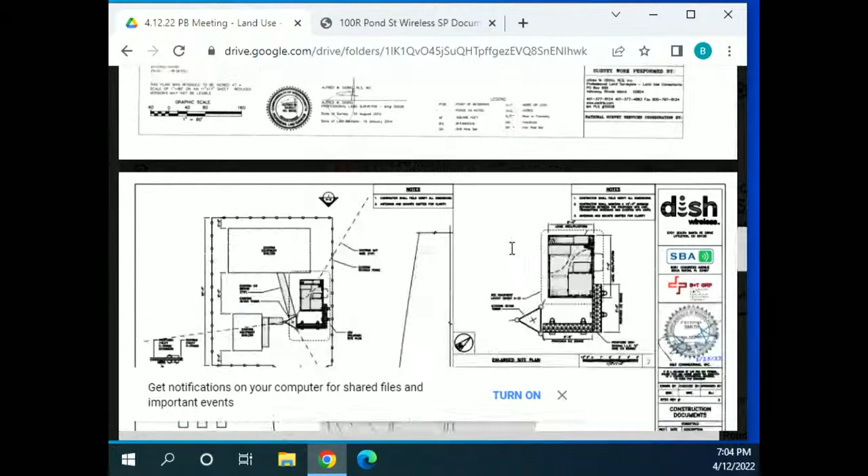Can that thing go away? Are these just traditional satellite receiver transmitters? Yep, exactly. Simple. I could get the measurements for you, but they're going to be like the radio heads, and the antennas are going to be up on the tower.

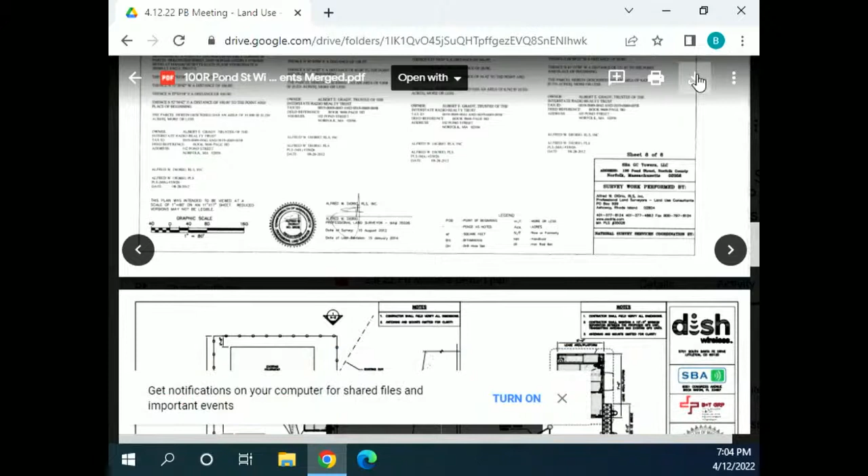But on the ground, I just want to show you that you currently have 3 - you currently have 2 other shelters on the ground. We're going to add a 3rd within that compound. The area shows what we're doing in terms of the actual size. The lease area that Dish will be leasing from SBA is only a 5 foot wide pad, and then they're going to have their ice bridge along the way that goes up to the tower. But it's going to be a 5 by 7 area in terms of leasing on the ground, if that makes sense.

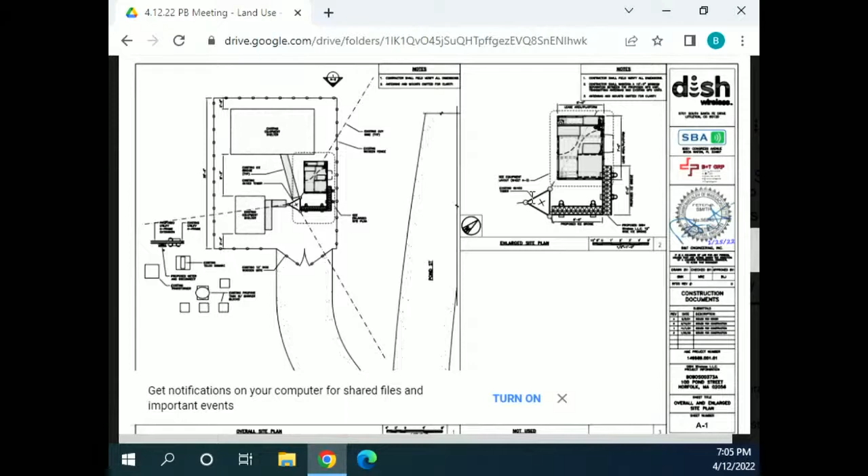Yeah, they're going to be leasing a few different antennas at different azimuths: 0, 120, and 240. They're 72 inches long and 19 inches wide. And the dish, they're going to be at the center line of 105 feet. That is page 11, Betsy. They'll show you how the antennas will be set up, transmitting radio signals.

Now, there are existing antennas on that large one, right? Yes, that is correct. There are antennas already at 130 feet up off the ground, and this is a guyed wire tower that stands 210 feet. Okay, so these are just fitting in below the existing ones, all right. Yes, that is correct. And slide 11 shows you where they would be in relationship to the other companies.

Is that a demonstration of just the new ones you're adding, or all the ones that are there? The current information shows all the current equipment on that tower, sir.

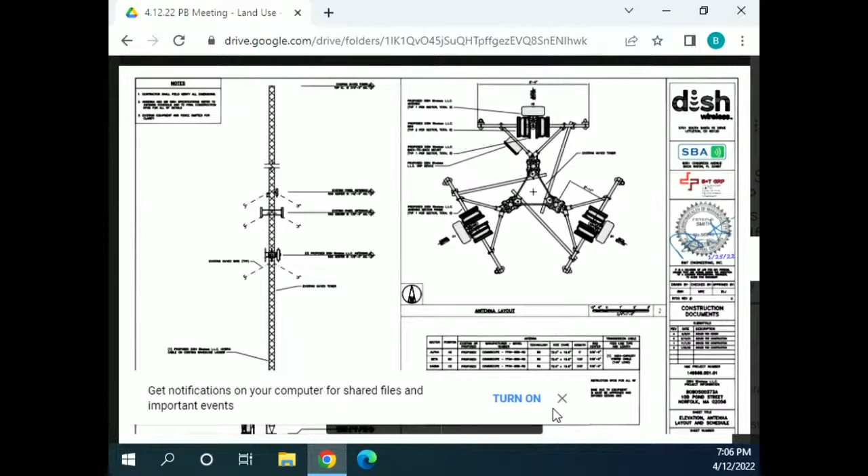Okay, so which one's the proposed? The proposed one on slide 11 shows it at 105 feet, 3 proposed dish wireless antennas, each showing different angles. So there'll be 3 antennas, and radio heads behind the antennas. That previous page, page 11. There it is, yes, that's it.

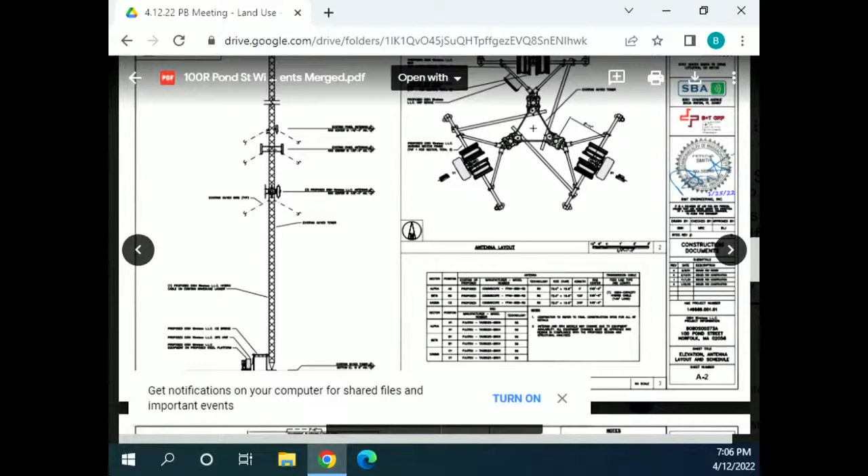So 105 would be the second one? Well, actually if you go from the bottom up, it'd be the very first one. It's kind of hard to read. Exactly, it's a little blurry on our screen. Yeah, I'm sorry about that.

And that 5x7 pad, is that just your MPO, where you're getting the signal from? That's it, all the utilities get in there. That's where the computer information translates the information for the radio signal, and then all the cables go underneath the ice bridge, up along that guyed wire tower to those antennas and to the radio heads, which transmit the information into the antennas.

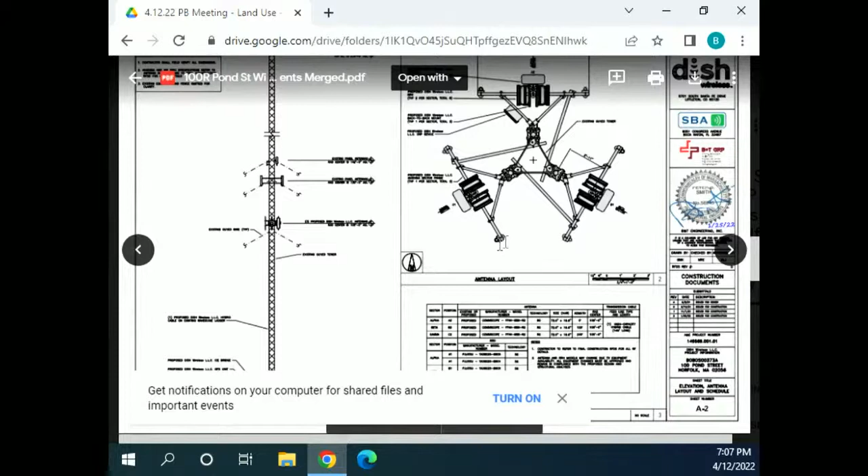Okay, so how big again, sir, is the unit you're putting on the pole? There'll be 3 antennas that are 72 inches height-wise by 19.6 inches width.

I always try to explain to people, these antennas are pretty big things, but you look at a traffic light and don't realize how big those are until they come down on the ground. Those are 3.5 to 4 feet tall.

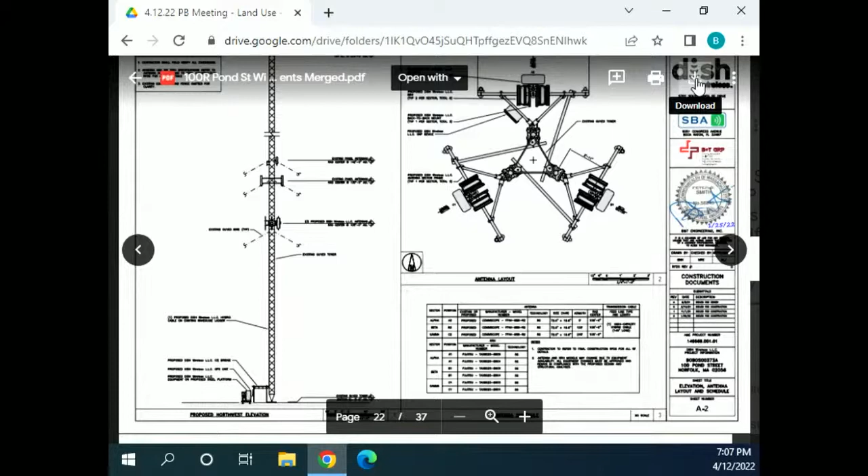How big are the ones currently on there? Probably the same height at this time. I don't have those exact dimensions since that's not my client, but I could look through the structural analysis report and tell you what they are. Give me 2 seconds... no, they're just more antennas of the same type, pretty much.

Do they create any noise, this particular antenna? I'm sorry, what? Will it create any noise? No, the antennas will not create noise.

Any other questions from board members here? No, pretty straightforward. Any questions from anyone in the audience out there? All right, well, hearing none, then...

I propose we make a motion to close the hearing, and then we'll just draft the decision. All right, so the Chair will entertain a motion to close this public hearing and instruct our town planner to prepare a written decision which we can sign in the near future.

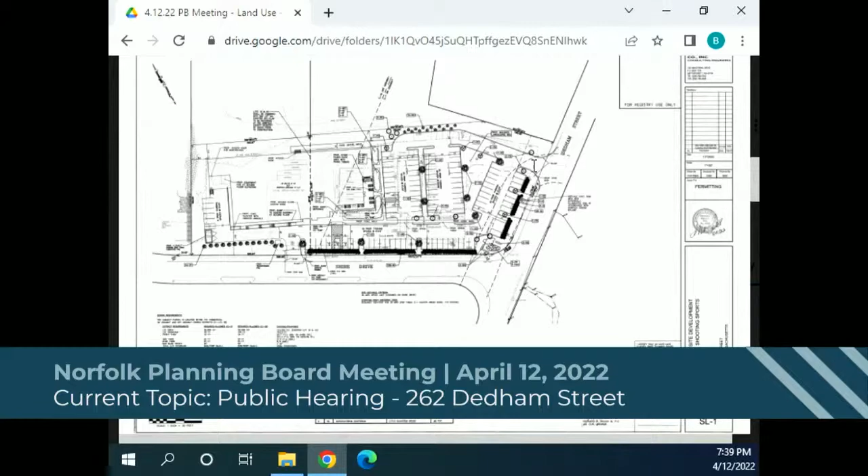That's the transformer pad along the entrance of Shire Drive, off of Shire Drive - that's the equipment storage we're talking about here. We had revised the site plan to include a row of screening evergreens along that side that would block the view of the transformer pad. Right there in the corner, right by the entrance. Gotcha, thank you.

I think that's all right - I wouldn't push for a fence around that at this point, given the industrial park setting. It's good they're screening it, but I'm not quite sure that section's really applicable to that use, the transformer pad - it's not outdoor storage, it's a utility. I appreciate the screening, but I'm not sure it's really necessary for that.

But nevertheless, they are doing it, which is a positive. That also addresses softening the view of the back half of the building from Shire. It does - we discussed that a bit with the design review board, that row of shrubbery there definitely does that. Just in terms of complying with the zoning bylaw, I don't think it's applicable for that piece. Correct.

We talked about the - how about this, page 8 here, T1? How does the board feel about the increase in traffic that's going to occur due to the business? What, as far as a traffic study? Yeah, I don't know if we've ever done a traffic study in any commercial area on Route 1A.

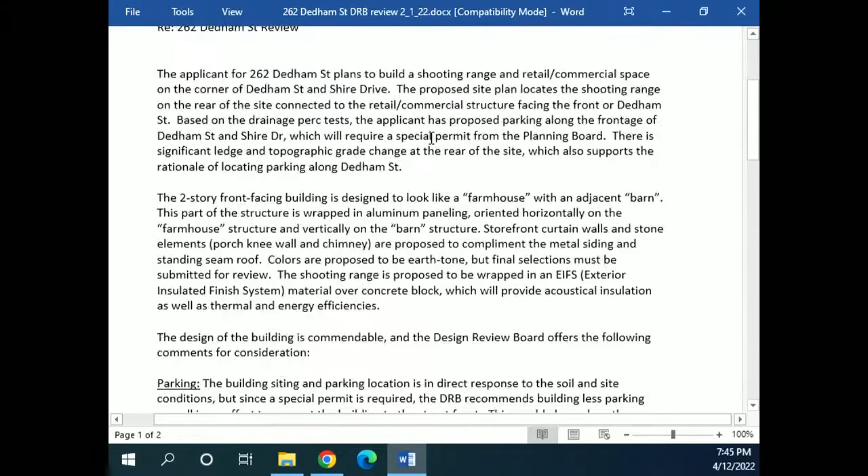So I believe we had the specific comments down below regarding the aesthetics and material choices. Scroll up a little, scroll down a bit, yeah. Okay, so here we go, parking, right? That's the first one.

I believe we've discussed parking already tonight regarding the front parking up front and the distance off of Shire. There was concern about pulling the building closer to Shire Dr. However, pulling the building closer to Shire Dr prevents a distance of sidewalk space between the building and the driveway, the required drive width, and then the required turning radius to actually exit out onto Shire. So pushing the building back any further, we are limited by the setback line on the adjacent lot.

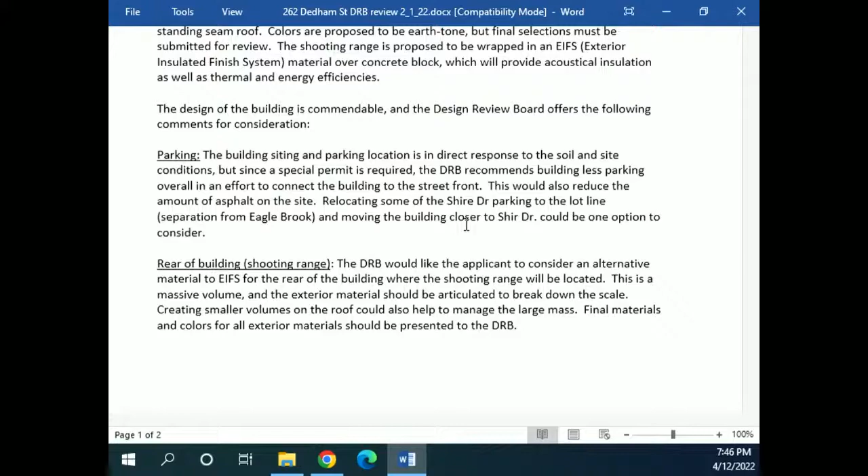That was a pretty easy one to resolve. Okay, now, was that information available to them when they made that comment? The dimensions weren't on the site plan to show those required distances, and to look at how the truck, because where we have the trash enclosure at the north corner, a truck has to make the turn and back up to the trash enclosure and out. So based on turning radiuses, the ingress egress point, and then the widths of the drives, that's what dictated our minimum setback. We could probably pull it a foot or two, but based on the positioning of the building, it seemed like value was not added.

Yeah, because for the record, these comments were generated February 1st, which was well before they had actually got to you, in terms of the public hearing. Because I think the siting was outstanding. Okay, let's see, next one, rear of building, applicant alternative.

This comment pertained to the material choice of an EIFS facade, which is an expanded polystyrene. I'm sure maybe you're familiar with the EIFS material. Is that the one they decided to use on the fire department? I am not familiar with the fire department. It's not a relatively new product, it has come a long way, but it is a very historic product.

A lot of changes have been made in the last few decades for the material used. It had been around since the 70s. I was going to say 80s, but then I'm born in the 80s, so it's been around since the 70s. But it has come a long way. The product now, we've chosen that material only because we have such a large expanse of facade, and we want to be able to articulate something with reveals and designs. The overall assembly for the shooting range themselves is really going to be driven by our acoustics.

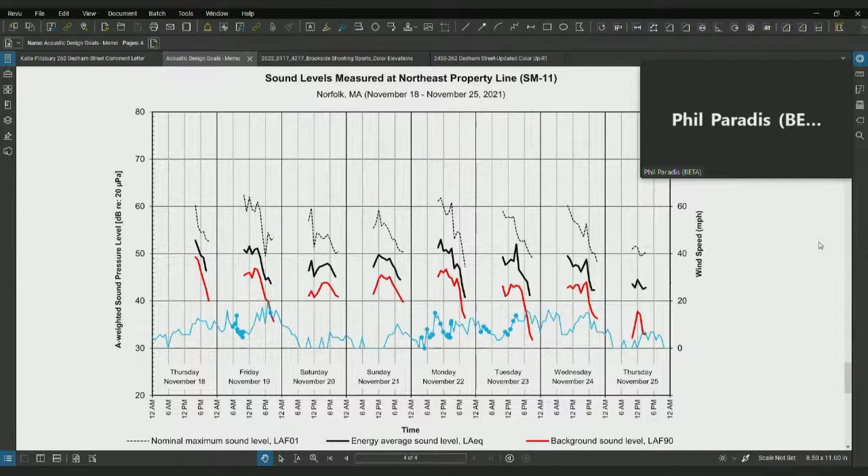So anyway, these generally are not applied at commercial property lines, but at what would be the first sensitive receptors, which in this case for this project would be the property lines at 5 Sharon Drive, which is about 300 feet distant from the site.

So the sound level limit associated with the state noise policy would be 45 decibels. You'll notice that for the most part, when the facility is operating, the background sound is already above 45 or very near it. As such, it's likely the gunshot noise would be either very lightly audible or not audible at all. During the quietest hour, around 9 o'clock at night, there might be an indication that the sound from the gunshot could be above the background, making it perceptible. Nobody wants to oversell the fact that this won't produce noise - it just will produce noise at a liminal level consistent with the existing environment.

Certainly it would be quieter than a loud car going by on the street, or a truck accelerating on Route 1A, which would produce louder and higher sound levels than the 45 dB we've defined as the limit for this project.

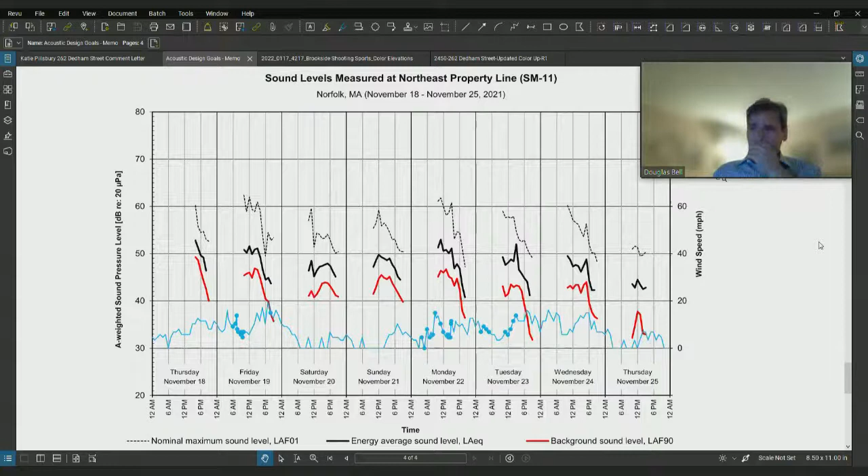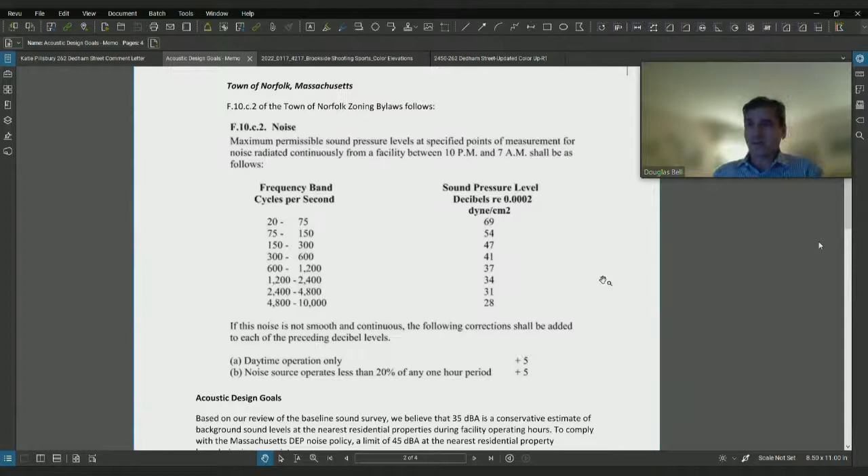Let's go back to the regulations section - I want to point out one other thing. We can stay right on page 2. The city or town of Norfolk does have a noise ordinance. We examined this very carefully, and what you'll see is that the noise ordinance has various sound level limits associated with various discrete frequency bands, so you can produce a certain sound level at very low frequencies, and these levels change with frequency. Unfortunately, the frequency bands established by this regulation became obsolete in the early to mid 60s, nearly 60 years ago. As such, there's no instrumentation available to measure to this standard, unless you'd go to a museum, I'd guess.

So you're saying we need to update our noise ordinance? You would need to update your ordinance for us to say we comply to the strictest level we can. However, I'd like to tell you a few things about this.

I can take the data within those numbers and extrapolate a sound level limit that appears to follow the intent of the ordinance. That suggests your noise ordinance, as written today, would require a sound level limit of 50 decibels during daytime hours, coincident with the operating hours of the shooting gallery. As I said, based on the state noise regulation, we've determined a limit of 45 would be applicable. So to some extent, your noise ordinance isn't as protective anyway as the state one.

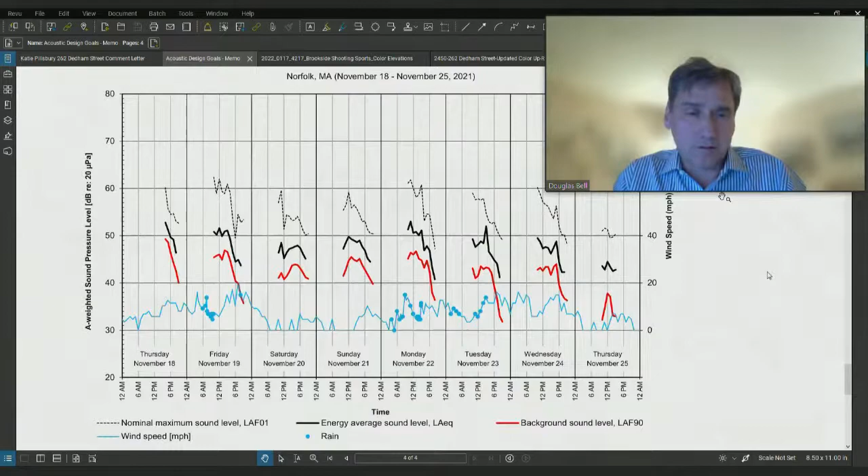What discrimination do animals have in that regard? I'm not an expert on animal hearing at all, I couldn't answer that question, I'm sorry.

We have someone in the audience who... Don't we finish first? Betsy, we also have people in the lobby who might be waiting. Somebody texted me. Oh, okay. We have people in the lobby? I'm not able to let them in. Yeah, everyone's been admitted. Thank you, okay.

Well, what's the consensus of the board? Should we let the lady speak now, or should we finish these gentlemen and then let her speak? If I can just finish one last statement, just so we can summarize some of the points that we've made. Finish it. We'll get to you, believe me. Yeah, I just want to summarize, and then I'll hand it off. I want to take a minute.

So we've defined the standards which we're applying, the analysis that's been conducted. We've discussed from a context point of view the operations, the building design, the business hours, and the limitations on ammunition type for acoustics. We've also wanted to talk about the existing noise creators, context, being State Highway 1A, only 350 feet away, with 24-hour use.

The bait shop, which has wood cutting, which is another business. Eagle Brook Saloon, which is open till 11 p.m., also a noise generator, direct abutter. The police station, which has a shared access road and, of course, has sirens going on Route 1A, as well as the gas station, which is also adjacent use, which is 200 feet away from the site in question. So there are quite a few other, just from a context point of view, other

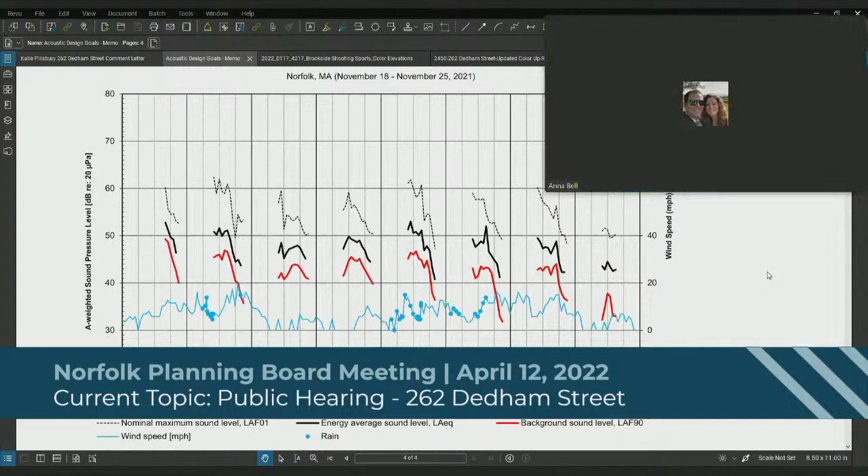So the inverse square law essentially says that as you get farther away from the source of sound, it gets quieter, and it does so with the square of the distance, meaning if you double the distance, the sound level, the sound pressure, reduces by a factor of 4, 2 squared. In a logarithmic sense it gets even more complicated, but there's a very simple rule of thumb that we use in acoustics, which is that if you double the distance from a source, then it would reduce by 6 decibels. So if we have a sound level of 50 decibels and we're 50 feet away from it, when we move back to 100 feet away, it would be 50 minus 6, or 44 decibels.

Thank you. And Doug, to add on to that, can you state the requirements of the decibel level that's not allowed to leave the limits of our site? The decibel level is going to be involved with the size and the design of the building as to what one might measure right at the face of the building. That hasn't yet been determined. What we will be designing to is reaching a maximum sound level at the property lines of these residential receptors of 45 decibels or lower.

So that, again, if you're... Thank you. One way of looking at it might be that if you're 300 feet from the building and you move to within 150 feet of the building, then the sound level would be potentially 50, 51 decibels. You get closer and closer. That requires that we're looking at sound level reductions on the order of 80 decibels between the interior of the building and the exterior. That's both achievable but requires significant acoustic design and acoustic details to make sure that can be achieved. Thank you. That's all I have.

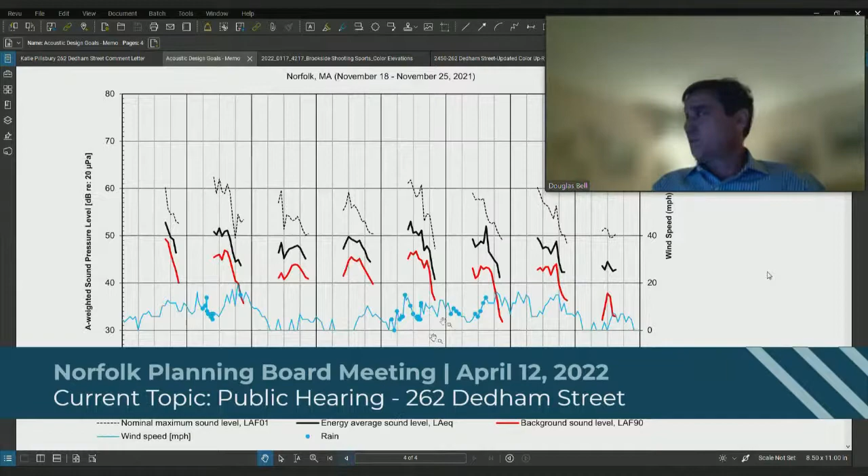But my interest here was — and can we go back to the figure that shows the site? — to find a location, that SM-11 location, that was most representative of those homes that are just to the north of that. Okay. And you'll see what you want to have is line of sight or no interference between the road, the main source of noise, as they do.

I mean, again, to simulate that. So I feel that the SM-11 point is, and again, it's somewhat irrelevant what happens after the building is put in place, because the property line behind it is a commercial building and would not likely be affected by sound from this facility. The spaces we're most interested in, the most sensitive, would be these residential properties where you can see the roofs of the buildings in this aerial photograph.

All right, you only lost me a little bit on that. Because I would have thought that once the building is there, you would be getting better data than you are getting now. You're saying that's incorrect?

That's incorrect, in that right now what I'm interested in is trying to represent what the background sound level is today at that home where the hand is on the cursor right now. If you want to just move that around a little, Dexter, that would be great. Right there, so understand, that's the baseline. And as you see, there's no large building between it and Route 1A either. So if I were to put my microphone behind a big tall building, I might find levels that are lower than are really representative of what that environment was.

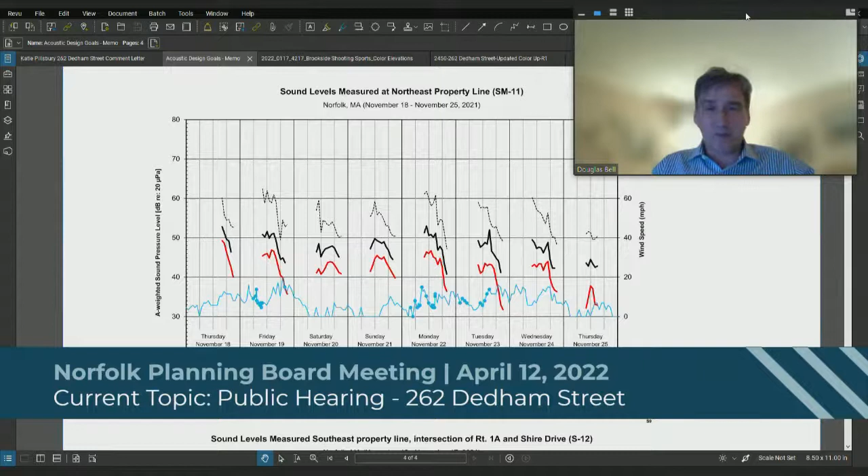But it is commonly done - there is post-construction testing done regularly. Mitigation options at this point would potentially include that if it was necessary, and I've not had to do this in my work, but there would be potentially two different options that might be available. One is, if you look at the design here, I should go back to the sound level data we examined on the site. There's a very, very significant drop off of background sound that occurs around 6 to 7 o'clock at night. So during the hours between 10 a.m. and 6 p.m. there's much greater masking sound available, and in that area you wouldn't need to meet 35, but you'd have to be under 45.

There could be restrictions on caliber and hours if necessary, though that's not something I foresee being needed. There could also be administrative controls and potentially supplementary acoustic elements, perhaps tall barrier walls or an additional wall along the side of the building. But we're not trying to solve a problem we don't have at this point.

The goal here is just to make sure our designs are conservative, and because of the stakes involved, we're going to be very conservative in the approach. I would think the board would include as one of its conditions a post-construction operational level sound survey to confirm the design is meeting the objectives.

Reasonable, thank you. I just wanted to know that if we didn't meet those objectives, there were other backup plans or mitigation we could proceed with. It's got to be, sure.

Normally there's a factor of safety if you're designing something, right? You're designing a bridge, you get an extra couple miles per hour of wind one day, you don't want it to fall. You didn't mention things like that, and I know how you got to the 35 and 45 decibels, and that's not to say that 45 decibels is by any means the limitation of all the acoustics and mitigation you could throw at this.

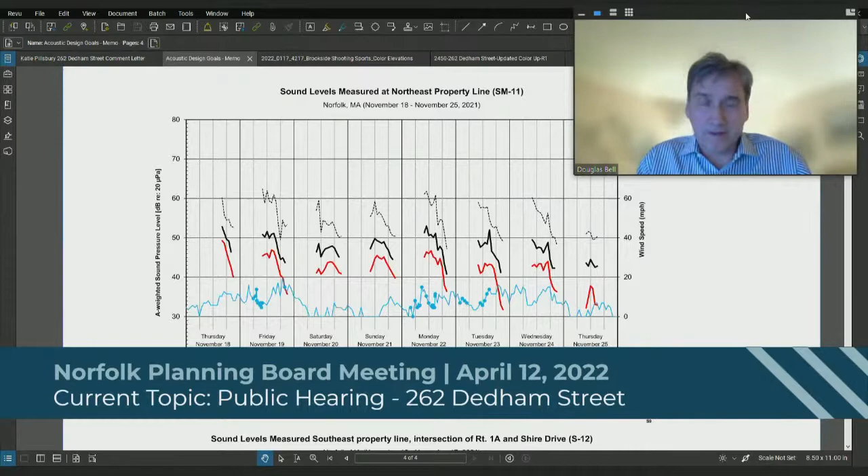The ultimate testing would be done perhaps by taking measurements with a handheld device, where you would set up and simulate activities in the gun range. You're looking for a yes or no? Let me go on, thank you. You're getting over my head again.

Do you have a record of any sound testing done at the Holliston facility? Because I actually was involved in that for a number of years. I'm not even familiar with the Holliston facility. You guys know? I know that it's an older facility. It's not that old, it's probably 20 years old, 15, 20.

All right, I understand. So basically, to me, you comply with all the state requirements. The testing is, you're sort of on your own to come up with the requirements. So as far as this board goes, I believe we have to comply with the law. So it seems like if you're saying you complied with all the state requirements and are within those levels, then I would say we have a hard time proving against that unless we decide to contest your testing, which I'm not in a position to do myself.

I think Walter's suggestion that we go back and retest down the road once it's up sort of covers everybody. You're not going to build this expensive facility and not have it complete and fail the testing. So I think the suggestion by our chairman really covers everything that's probably unknown at this time. I think it's a good suggestion, but I'm worried about what kind of mitigations we have at that point.

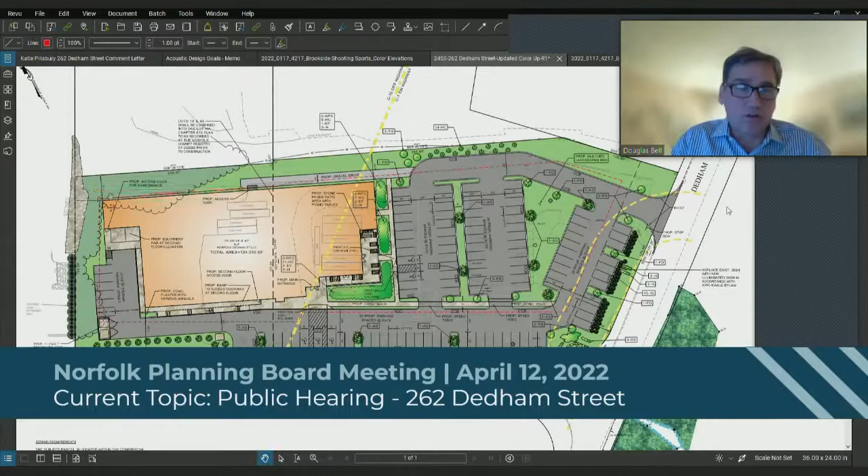Yeah, I was thinking as I was reading the question, I was thinking of the sound barrier walls you see alongside highways that have that mitigating property. Yeah, keep the noise level from the highway from getting into, or at least cutting it down, getting into the adjacent neighborhoods. I don't know whether the board would entertain that, but again, that's a what-if for down the road, after we do the post construction and get the operation up and running and measure the sound level again. Exactly, to find out what's going on. That would be possibly one of, who knows, a dozen different ways to mitigate a problem if it exists.

Okay, any other questions coming in from Zoom, by the way? Betsy, you see anything? Any hands up? I don't see any. No? I want to add.

Please take a microphone and identify yourself. My name's Mark Clarisi. I live at 22 Everett Street in Norfolk. And I've been shooting for probably 55 years.

And you can carry on a conversation inside the non-shooting range of an indoor range. You know, the range is behind you, the people are behind closed doors. So by the time it gets outside, think of it this way: the dogs are in their kennels, and it's raining out, and raindrops are hitting wood or metal. If they hear it, that's what they're going to hear. Just to give you an idea, with the way these guys are engineering this, and I've been in them, I belong to a club that has an indoor range.

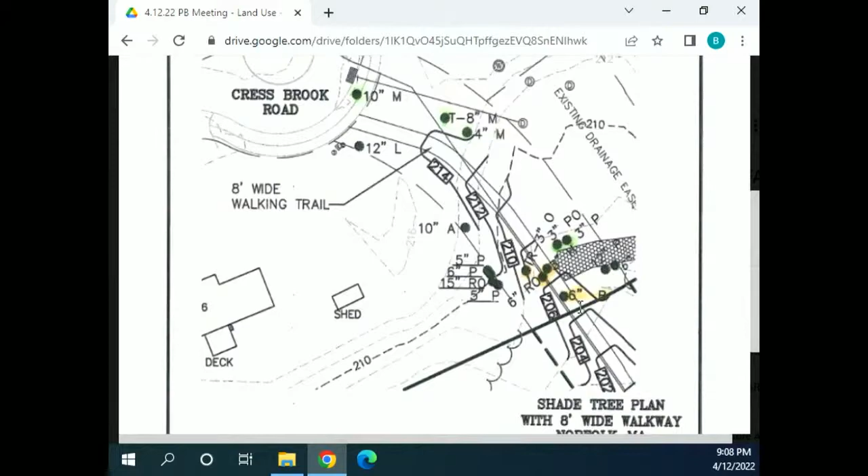So we will address that, but not tonight. We need Rob here to discuss it with us. But thank you for raising it, we will deal with it.

Thank you. Okay, anything else on Norway Farms, Rich, before we move on? No. Okay, next item is MacArthur Avenue definitive subdivision.

Review and approve the decision for a roadway improvement plan for one existing lot on MacArthur Avenue off the end of Hunter Avenue. I think we have the decision in our package. We've reviewed it, and we should be prepared this evening to sign it.

I think we've already taken the vote to approve this. Is that correct, last meeting? Yeah, voted to close the hearing. We closed the hearing, we didn't approve it. If you close the public hearing, this will be the vote to approve it.

So that, what's before you has been forwarded and submitted to the applicant and their attorney. I believe they didn't have any issues with what's been drafted.

All right, so how many pages is this thing? It looks like it's 7 pages, okay. Any need for further discussion on this before we take a motion and vote to approve it.

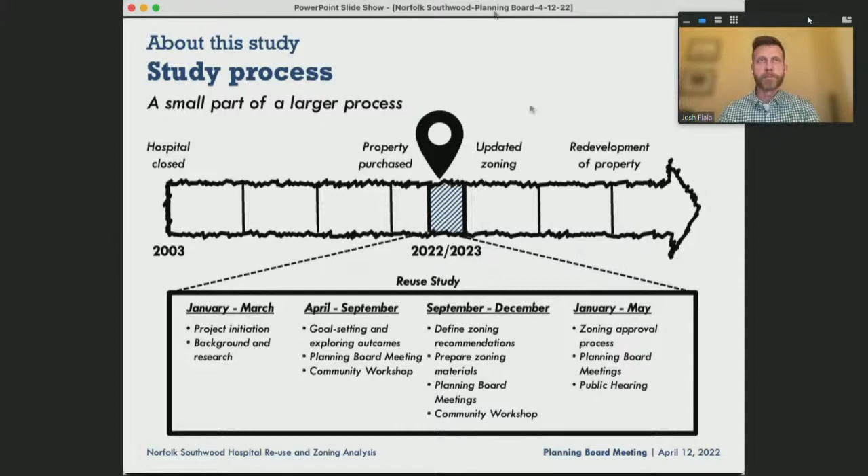So I'll pause there and just see if the board has any questions or comments about that first introductory section.

Continue. Keep going. All right, we'll keep going. Thank you, Chair.

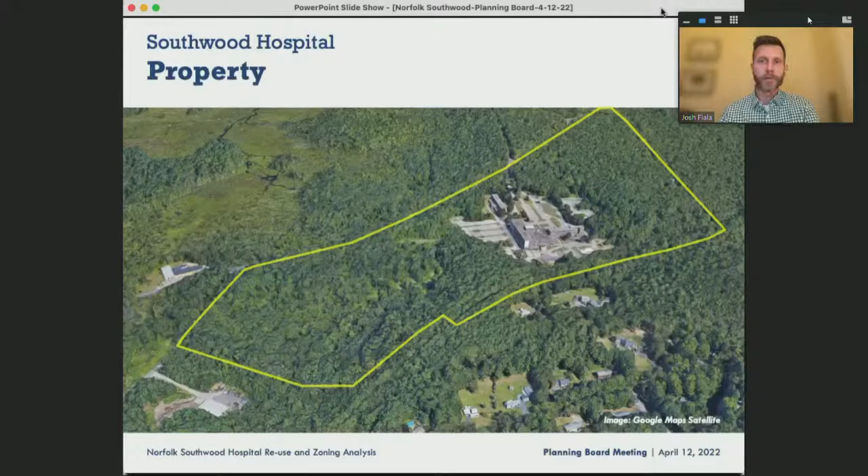I'll go a little quicker now. I threw in a few slides that are a snapshot of our initial research and investigation, but I wanted to show a few about the site itself. The overall property boundaries are shown roughly. We need to reconcile our property boundaries with those identified in the public involvement plan and make sure we've got exactly the same parcels. I've noticed our overall outline here is a little different from that previously presented by the property owner.

Overall, the property is highlighted here with some of its statistics, about 88 acres. Again, a long history on the property with the state hospital, lots of milestones, including it being associated with the first efforts around cancer research and some real significance around its property history.

In 2020, the investment group, the current property owner, presented a concept to the planning board, including a distribution warehouse potentially, and that I believe was a catalyst for this planning study to help look at potential reuse opportunities and options, which would hopefully be better aligned with what the community would like to see on the property.

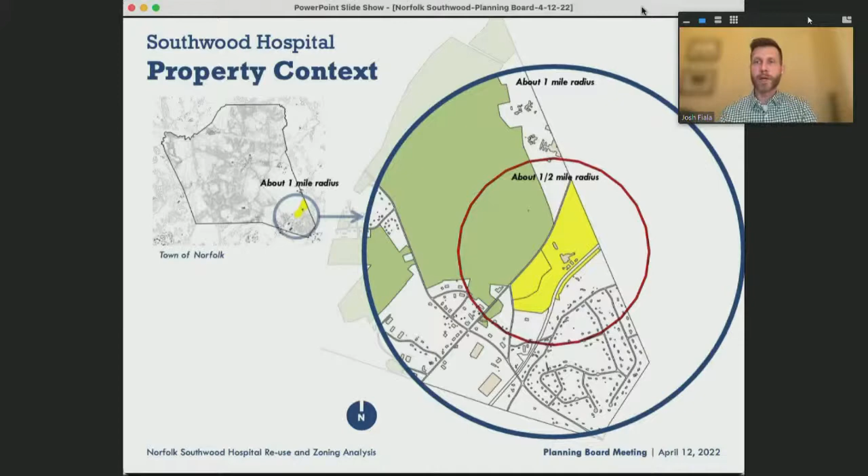Here's the property context in the southeast corner of the town, with neighboring context also in the town of Walpole, and a small portion of the property itself is in Walpole as well, one of the parcels.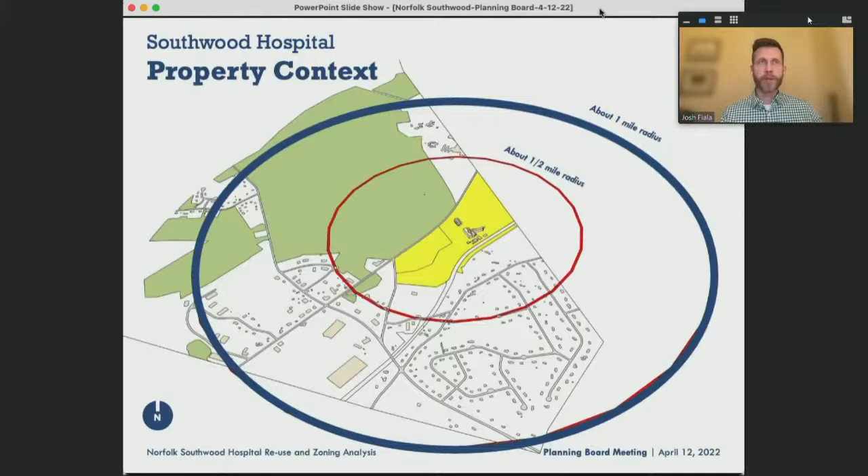Here's another view of the property context as well. The topography on the property is something to note, shown in the diagram now. The topography flows from a high point at the Walpole town line across the site. You can see some neighboring properties are also at a higher elevation relative to the property itself.

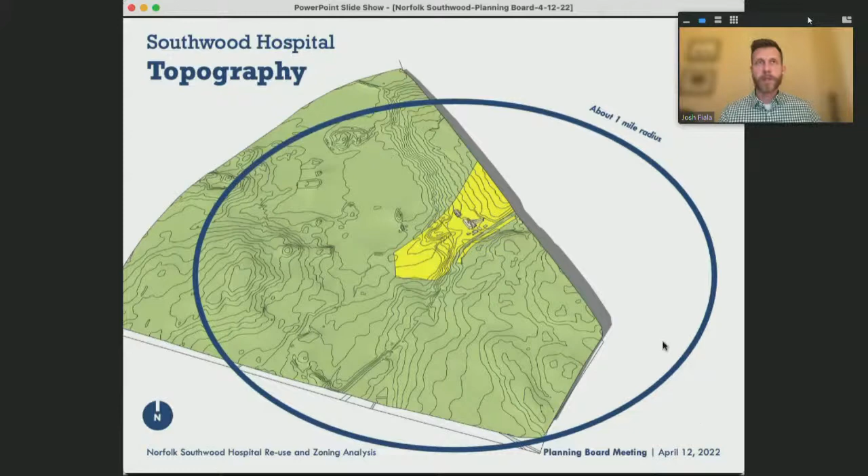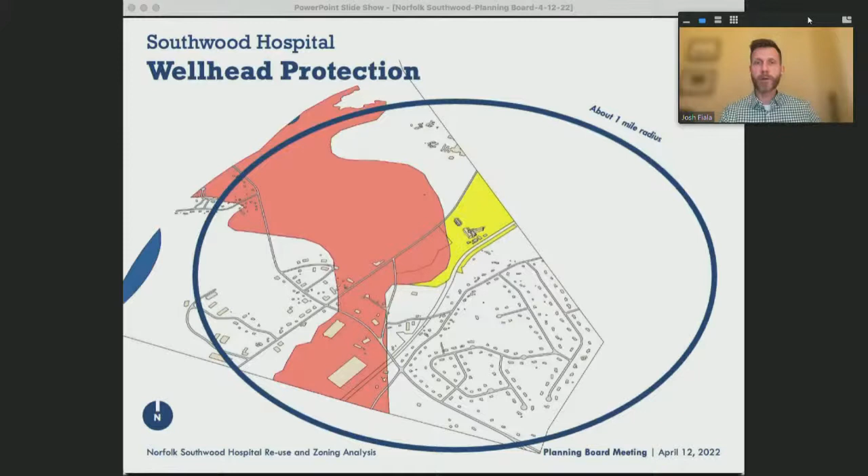After viewing the topography, the wetland locations make a little more sense, with water flowing down along the property to the area in green on this diagram. A wellhead protection area is also present in that portion of the property. And some flooding areas are highlighted and outlined along the Stop River, which is adjacent to the property itself.

In addition to these diagrams, which we've started as part of our initial investigation, we'll also be adding locations of contamination on the property, which is an important topic and consideration in terms of those locations and the potential reuse options we'll be exploring.

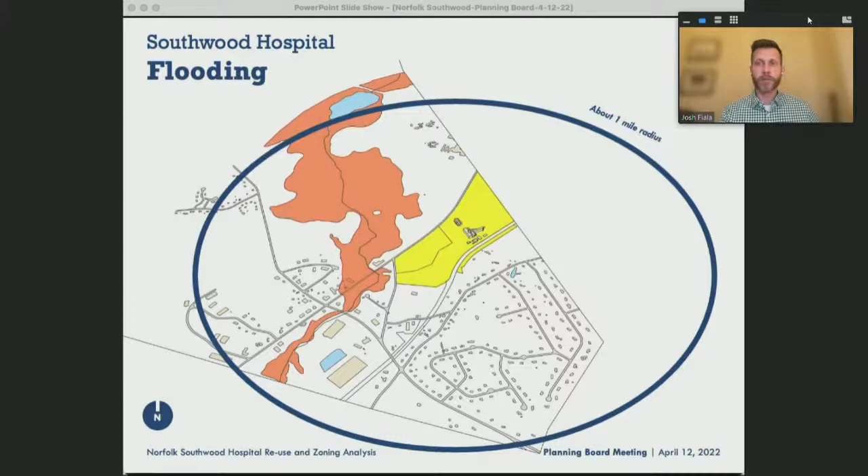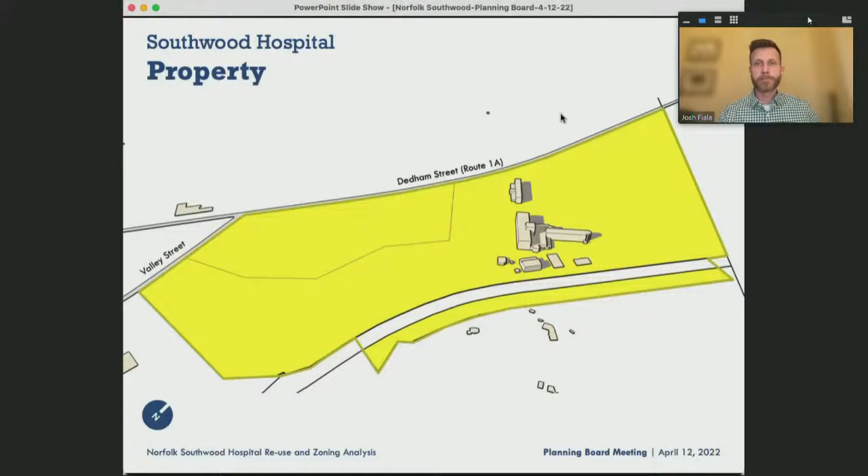Here's another view of the property with the existing structures which still remain. The property is about 88 acres in total, as I mentioned. If you remove the wetland and wellhead protection areas, that leaves about 75 acres remaining, shown in yellow on the diagram now.

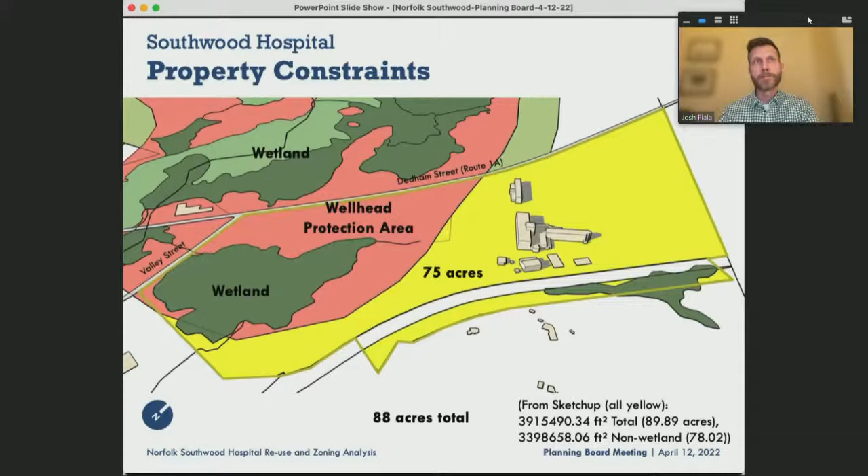This depicts the paved areas, shown concentrated in and around the existing buildings. Significantly, I'll mention that the proposed route of the Metacomet Greenway is directly abutting the property and will be a potentially great benefit to the property in connecting its future development through multimodal connections to the surrounding areas.

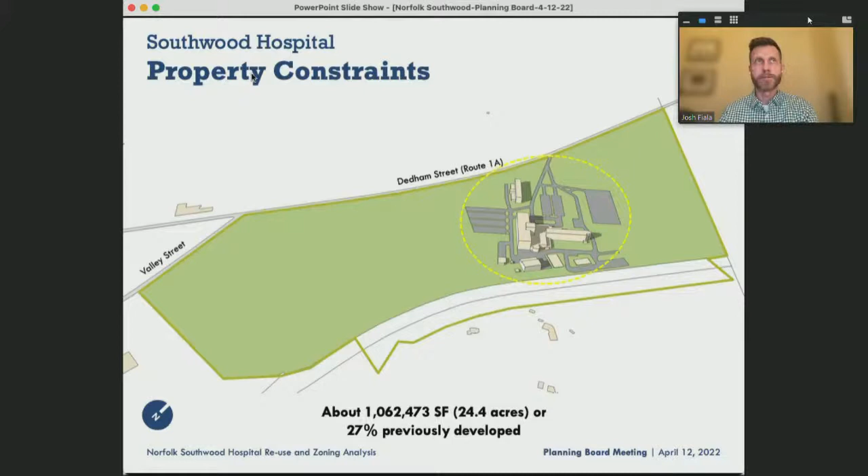In addition to looking at the physical attributes and constraints of the site, we've been reviewing past plans, and we invite the board or general public to refer us to other plans which might not yet be on this list, including from the property owner if there are more recent documents we may not have yet. We're looking through these to make sure we have a solid foundation and understanding of what's been previously explored, and also looking at the documents which form the foundation for the town's perspective on this property.

That includes the zoning bylaw, of which there is a zoning district today for the property, the housing production plan, which is currently being updated but the most recent version we have is from 2017, and the Norfolk master plan from 2007. Each of those documents do actually mention the property, and I'll touch on that now.

The housing production plan states to work with the owners to redevelop the property with a mixed-use housing development with a significant affordable housing component and expansion of the diversity of Norfolk's housing stock, which is primarily single-family today.

There's some additional language from the housing production plan. I won't dwell on that tonight, and some other items from the plan. The Norfolk master plan indicates that the property is within the open space goals to clean up contaminated sites near valuable open space, and it includes reference to the Southwood Hospital along Stop River Corridor.

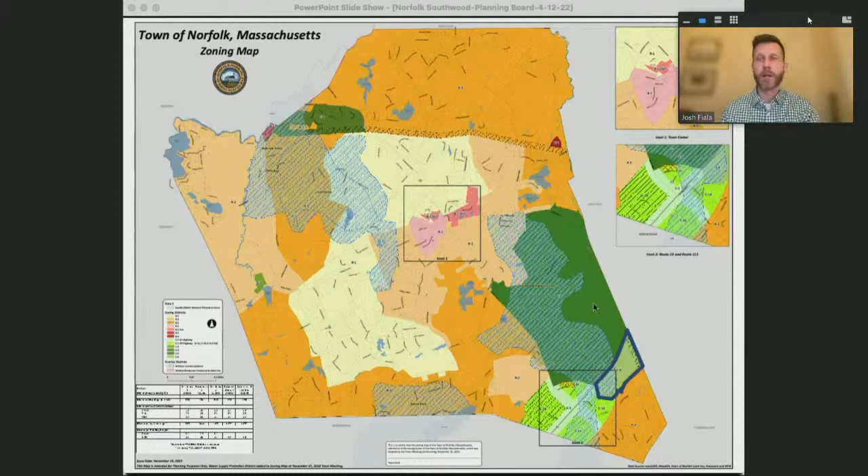The current zoning on the property today is primarily zoned C-6, Commercial-6 zoning, with a small portion in the R3 district, I believe. It's also within the Aquifer Water Resource Protection Zone. That C6 zone is in section L under the town bylaws, so section L would be the primary focus of our zoning review and work.

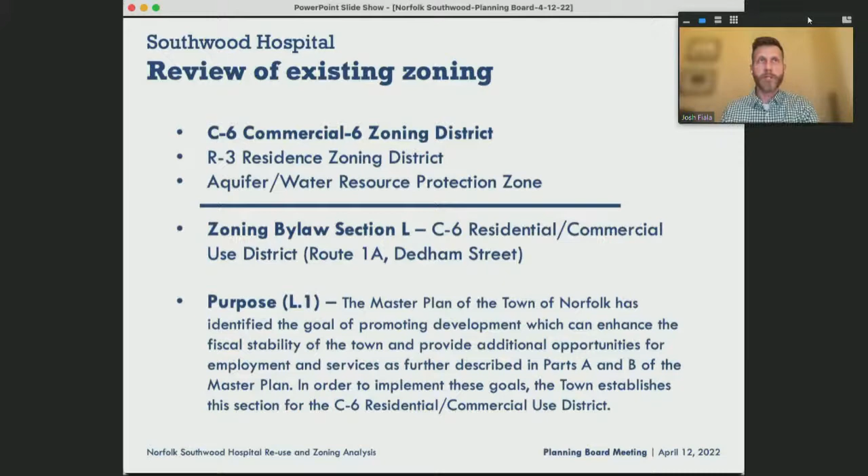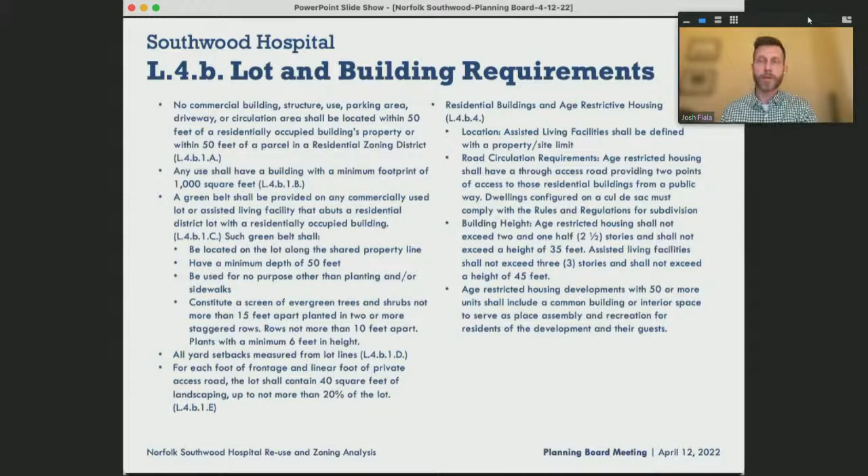So I've included just some of the subsections from section L, just to give a feel for what those items are - the overall purpose of section L, and general district requirements. I'm not going to go into detail this evening, I'll spare you that since you've already had an extensive meeting tonight. These will be the characteristics subject to modification and revision based upon the community's goals, priorities, and vision for the property. We'll be reviewing those in detail with both the board and the community throughout this process.

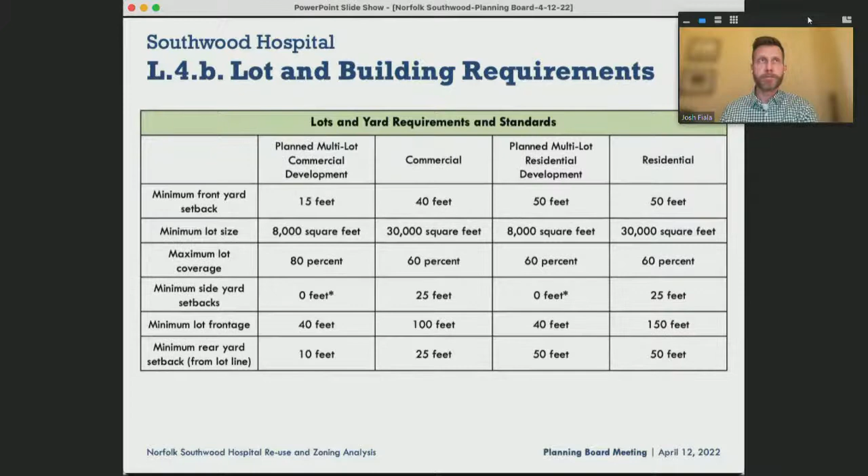The lot and yard requirements and standards are also subject to consideration based upon the visioning. There's also sign regulations and parking regulations specific to the district, and an extensive listing of allowed uses, prohibited uses, and special permit uses. So these will all be subject to review and then modification based upon the community preferences.

So maybe I'll go ahead and wrap this up, then you can ask any questions or clarification remarks. In terms of next steps for this process, I wanted to outline this clearly so people know what to expect and hopefully avoid any misunderstanding. But we're really at the start of this process - this is the very beginning, our first conversation with the board, first conversation in a public setting.

We will be doing outreach to neighborhood groups, the property owner, and trying to have more conversations and get acquainted with all the various parties. We've put together a pretty simple and straightforward engagement strategy, which we can share with the town planner, the planning board, and the general public.

The goal over the next month or so is to prepare ourselves for a community workshop, which would be the first session to really focus on a discussion through exercises and engaging opportunities in that meeting to learn more from the community directly about what's hoped for and anticipated on this property, so we can begin to define what that vision and set of goals and priorities look like.